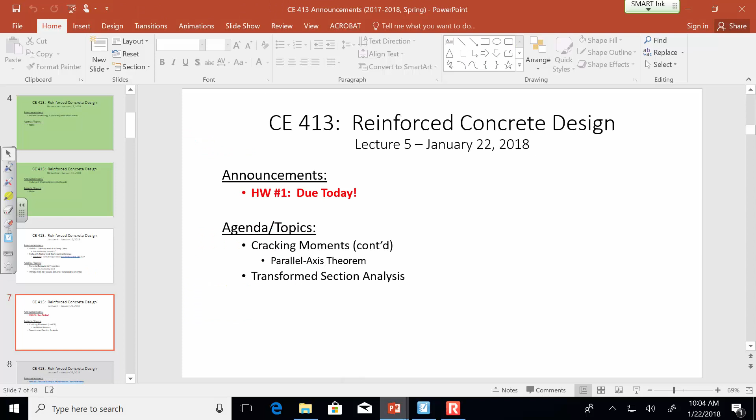I want to continue our discussion of cracking moments. That's going to take up the big chunk of lecture today. We're also going to talk about the parallel axis theorem, something you employed in mechanics of deformable bodies, and probably in statics and dynamics too. I'm not really sure, but regardless, I want to revisit it and represent it in a systematic, straightforward way. You need that concept in the back of your head in order to do transformed section analysis. The long and short of transformed section analysis is: cracking moments are basically trying to determine how much moment a concrete beam can resist linearly until it cracks. What happens after it cracks? You have to perform a transformed section analysis, which we'll get into the specifics of later. The long and short of it is you have to ramp up the math a little bit, but it's not too bad. Okay, so let's kick it off where we left off last time.

Last time we were looking at this problem, example 2, and we said let's determine the cracking moment. The cracking moment is determined by taking FR times IG divided by Y sub t. First, FR is our modulus of rupture, which is 7.5 times lambda times the square root of FC prime. Lambda is 1 because we're dealing with normal weight concrete, and our FC prime is 4 KSI.

Now remember, when you calculate F sub R, you've got a square root of FC prime going in there. When you have a square root of FC prime, how does that work? You put in PSI and you get out PSI. So you say 7.5 times 1 times the square root of 4,000 PSI, and your numerical response, which is like 474 something, comes out in PSI. So the modulus of rupture of this concrete is 474 PSI. That's how much tensile stress it takes to cause the onset of cracking in a flexural element.

So this is the stress that causes cracking. IG, your moment of inertia, it's a rectangular section, just BH cubed over 12. Y sub t is the distance from the centroid to the bottom of the section, because we're talking about positive bending and the bottom is experiencing tension—that's 9 inches. So plug and chug, don't forget to throw in your unit conversions, and you get about 25.6 foot kips. So the cracking moment for this section is 25.6 foot kips.

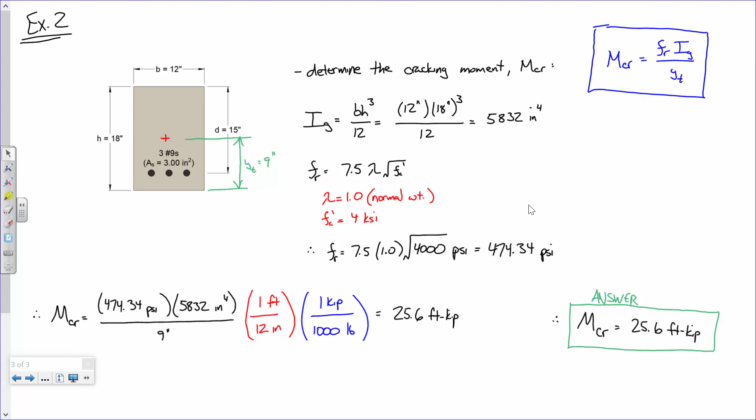In other words, if I want to determine the tensile stress... yes, that's the modulus of rupture. FR is the modulus of rupture. That's the stress at which cracking will begin. Sound good? All right.

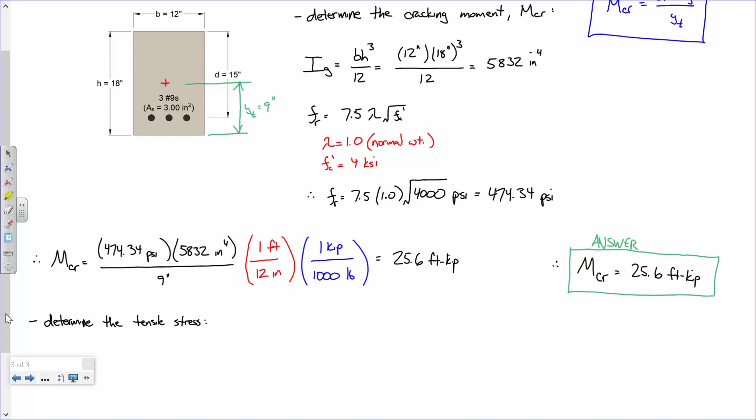So if you have a beam subjected to a bending moment, and you know Y and you know I, if I want to determine the tensile stress, it's just sigma equals My over I. Instead of sigma in reinforced concrete, we tend to use the letter F for stress. So I'm going to say the tensile stress is just My over Ig, and I'm going to call that... hold on... YT.

Okay, so plug and chug, and I want to make sure everybody's clear on what I'm doing. This beam is subjected to a bending moment of 25 foot kips. So I want to determine what is the bending stress under 25 foot kips. So I'm taking 25 foot kips times, what's Y sub T again? 9 inches. And the moment of inertia is what?

All right, anybody see a problem? Okay, feet and inches, it's not really matching. Again, and I mentioned this in structural analysis, it really wasn't too big of a deal because a lot of our units were really consistent there. Units really wasn't that big of a deal, like especially when solving for support reactions. All your forces are in kips and all your distances are in feet, so it worked out. In here, got to be a little more cognizant when it comes to your units.

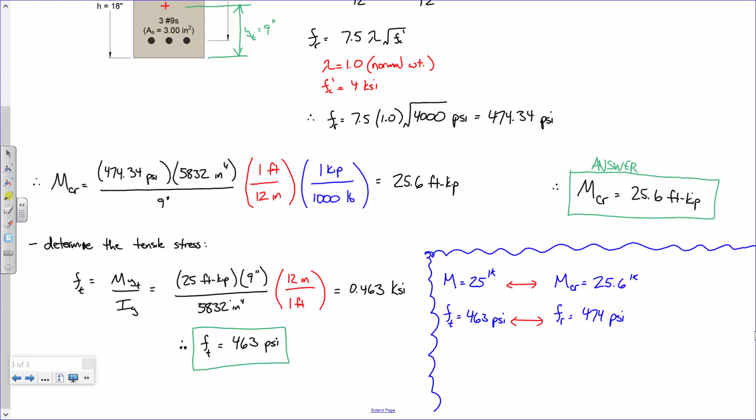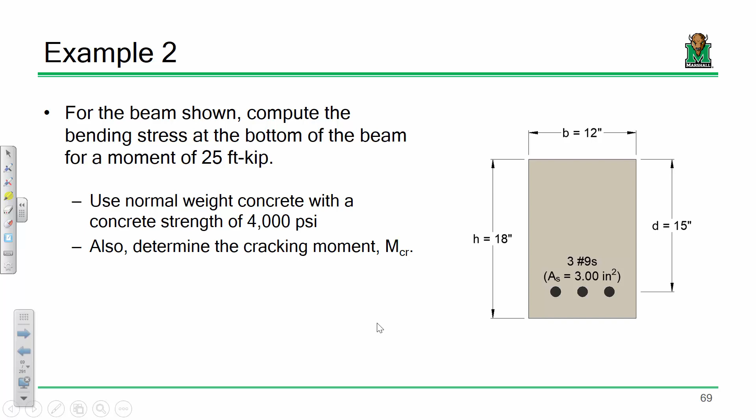Now I'm going to take this example that we just did, and we're going to do it again, but I'm going to make it a little more complicated. So this is the example that we just did. One thing you'll notice, what's one piece of data that we didn't use at all in this example? The rebar, we didn't care about it. Why not? Because we were looking at moments before the cracking moment, stresses before FR. The rebar doesn't really matter in that instance because we haven't experienced cracking.

On example 3, it's a very similar scenario, so I'm not really worried about the cracking. What I am worried about is this. I have a beam, and honestly, this really isn't even a reinforced concrete problem, it's just a straight mechanics problem. Here's the beam. It's subjected to a bending moment of 80 foot kips. What's the bending stress? This is a mechanics of deformable bodies review problem.

Let me ask you this: what's the moment of inertia of this? We knew the moment of inertia was just BH cubed over 12. What about that one? How do you determine the moment of inertia over that? It's a trick question because it's a process, not just a formula. You have to use the parallel axis theorem. We'll take it a step at a time, because for those of you it's been a while, it's not that bad.

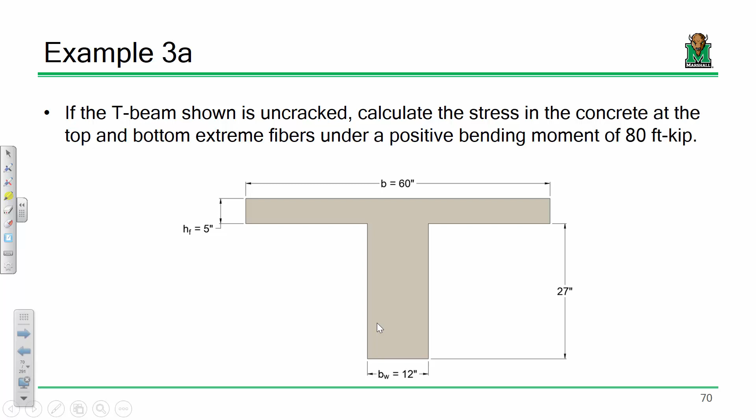It's like 10:15, it's not that early. Come on now. What's that? Yeah, yeah, all right, okay.

I'm lazy, so I'm copying this over. Okay.

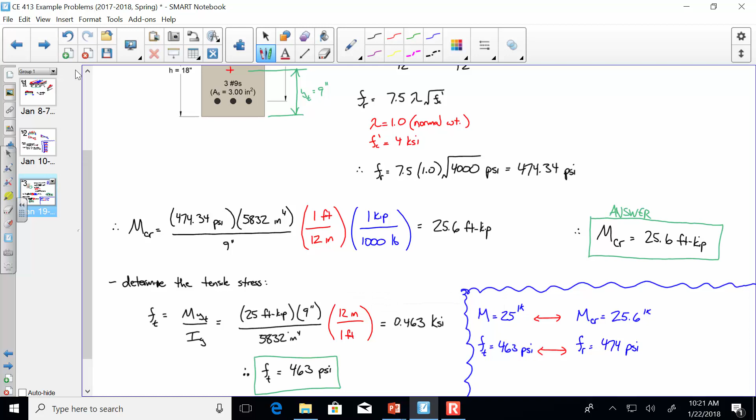Woo. That is big. Okay.

So like I said, this problem really isn't so much of a concrete problem as it's a mechanics problem. But don't worry, it ain't so bad.

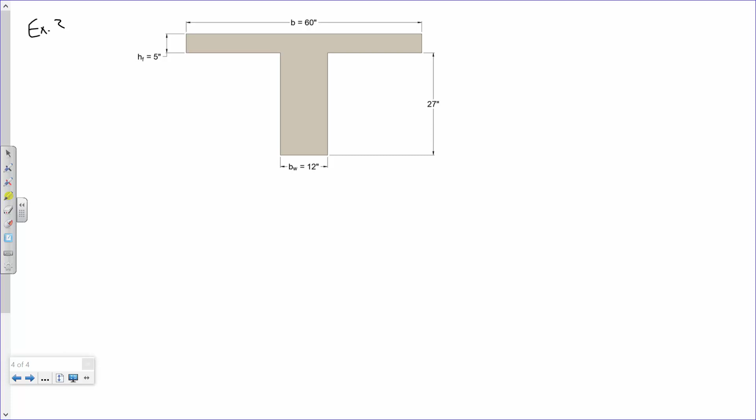What I'm going to do here is determine the moment of inertia of this shape. I'm going to use a procedure similar to something you've seen before, but present it in a little bit of a different light. In order to determine the moment of inertia, the first thing I need to do is determine the centroid. That's where we're going to start first.

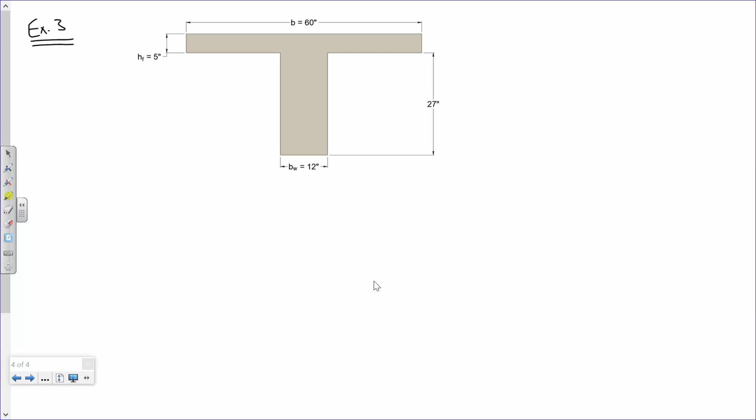In order to determine the centroid, if you recall, everybody here has done a centroid calculation before. We have to first determine a reference datum. So you pick a point, maybe on the bottom of the section, and we'll call that the reference datum. Because how do you determine a centroid? Sum of AY over sum of A. The Y distances all have to be referenced from a common location, so I think it's simplest to reference everything from the bottom.

The next thing you have to do is split this shape up into simple shapes. I see two rectangles here, so I'm going to split it up like so. We'll say this is shape 1, and this is shape 2. We split it into simple shapes because we know where the centroid of each individual shape is. The centroid of shape 1 is probably about right there, and the centroid of shape 2 is about right there.

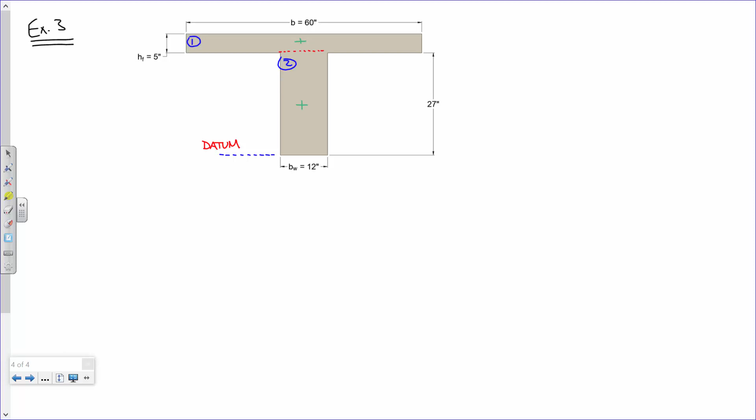Now I'm going to draw a table down here, and I'll warn you, it's going to be a long table, like seven columns, so just be aware of that.

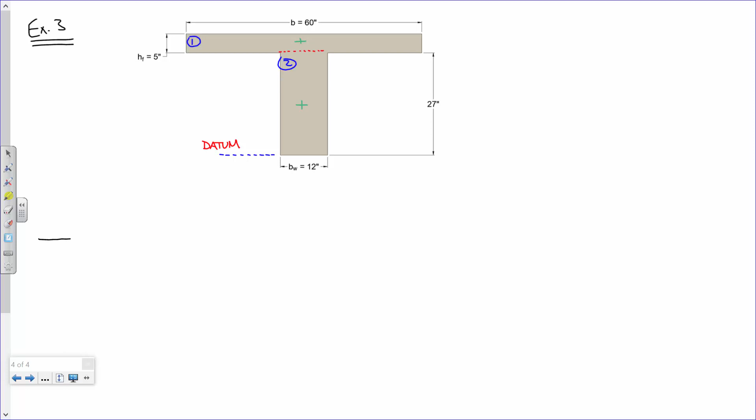So let's draw this out. We have shape 1 and shape 2. Like I said, there's going to be about seven columns, so just be aware of that. Now I'm going to determine the centroid first.

In order to determine the centroid, it's sum of AY over sum of A. So Y bar is the sum of AY over the sum of A. We're going to take our time with this. Let's start off with each of these shapes and ask ourselves what's the area, which will be in square inches. So what's the area of shape number 1?

I got 300, right? 60 times 5 equals 300. We don't need units because I've got that on the top of the column. All right, so that's the area of number 1.

What's the area of number 2? 324 — do I have a second on that? So if I sum those up on the bottom, I got 624. Fair statement?

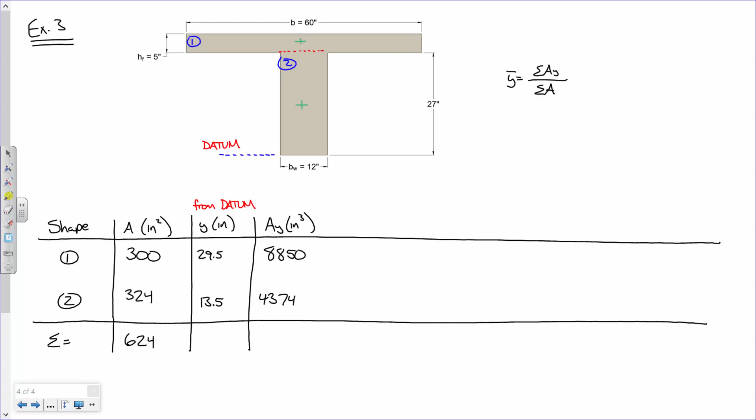What's the second one? All right, so add them up — what do we got? 13,224, do I have a second on that? So up top, I can say this is 13,224 inches cubed divided by 624 inches squared. What does that come out to be? We'll say to 2 decimal places.

Do I have a second on that? Okay, all right. So far, so good?

Now, here's where the parallel axis theorem comes into play. We can determine the moment of inertia of a simple shape, a very basic shape, just BH cubed over 12 for a rectangle or any other simple shape, you can look it up.

But to determine the moment of inertia of a composite shape, something like this T-beam, because this T-beam isn't a rectangle, it's 2 rectangles, how do you determine the moment of inertia of the whole thing? You utilize what's called the parallel axis theorem.

The parallel axis theorem states that the moment of inertia of a composite shape is calculated by summing up the following terms: I naught plus AD squared. You do that for all the shapes in the cross section.

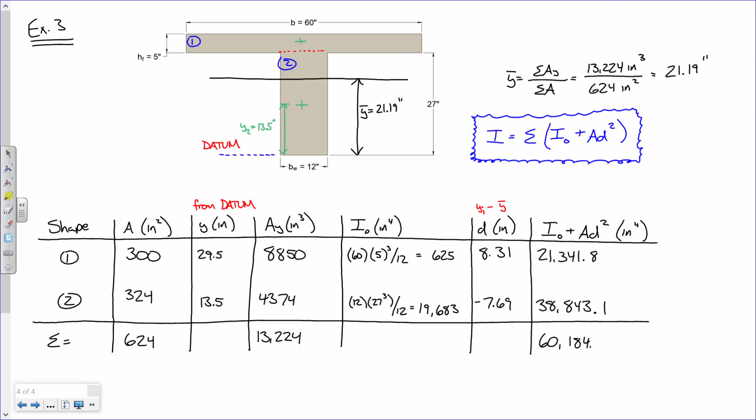60,184.9. So I propose that the gross moment of inertia for this beam is 60,184.9 inches to the fourth. That's not the answer, that's just the gross moment of inertia.

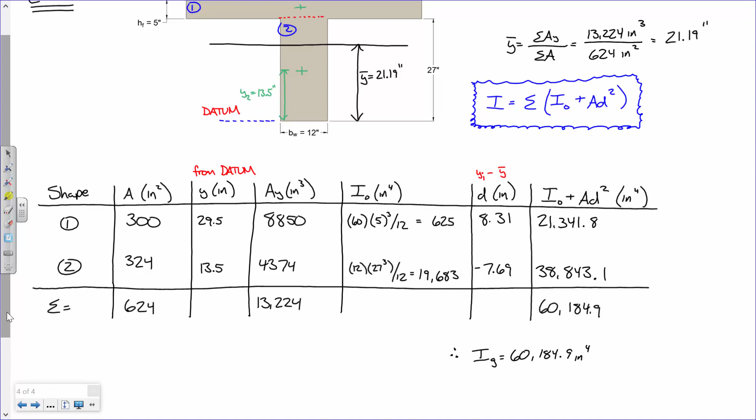Sound good? Is this bringing it back a little bit? You might have done this a little differently, but I've got to believe you've done calculations like this before in some fashion or another. This is also a very nice Excel-friendly template because you could just spreadsheet this whole thing.

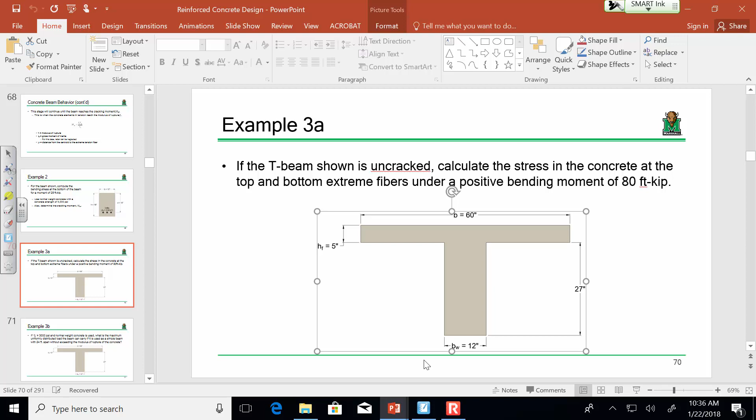Okay, now let's go back to the example. So if I have this T-beam and it's subjected to a bending moment of 80 foot-kips, what are the stresses in the top? I asked for the compression and tensile stress because I want to make sure everybody's clear about what's going on. I want the stress in the top and the bottom.

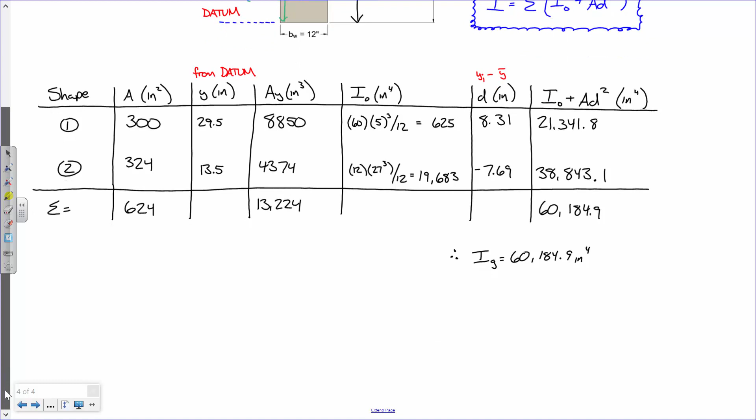Remember, if you have a beam and you bend it, the center sees zero stress, everything above the center sees compression, everything below sees tension, but I'm using the term center a little loosely. What I'm really talking about is the centroid. See, here is our beam, and the centroid is about right there.

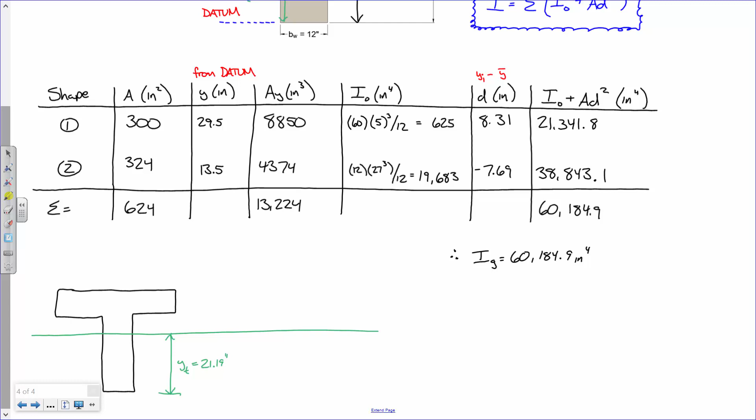So for this beam, I propose, what is this distance right here? Anybody remember the number? From a notation standpoint, I propose that's YT. That's what that is, right? From the centroid to the tippy bottom of the section, if you will.

So this distance, let's call this YC. Now what is that? 10.81. Now how'd you get that? Just take the whole height and subtract that distance, so 10.81 inches.

Okay, so there's our geometry, and if we look at our bending stress profile, it looks something like this. Remember, it's linear from the centroid, so it looks something about like this, sort of like that.

So this term right here, we'd call that F sub T. I'm actually going to call that F sub T tens, because if this is the maximum tensile stress, this right here is going to be the maximum compressive stress. I don't want to use FC because I don't want you to confuse that with FC prime. FC prime is a material value; this is looking at the actual stresses on the section. Sound good?

10.81. Oh, whoops. Thank you. You're right, thank you. We'll say 0.1 on the mistake counter this semester. Is it? What's that? 0.1, 0.1. It was supposed to be 0.1, so it's 0.1 on the mistake counter. That's how my brain decided to make it work. That was a joke.

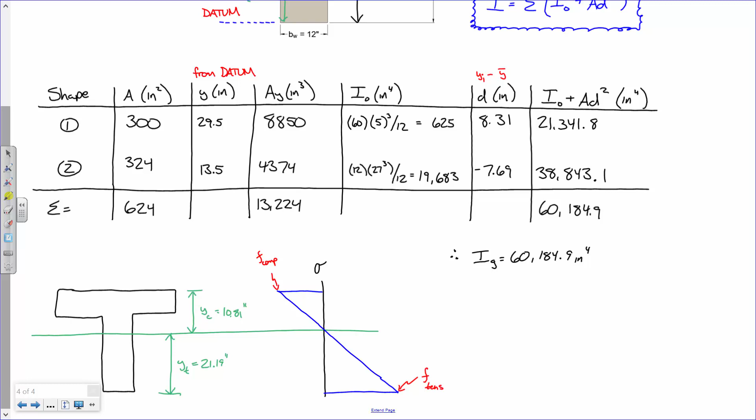Everybody good on this? Everybody good? Okay, all right, settle on. Okay, so if you understand this, then can I go on to the next panel? Okay, all right.

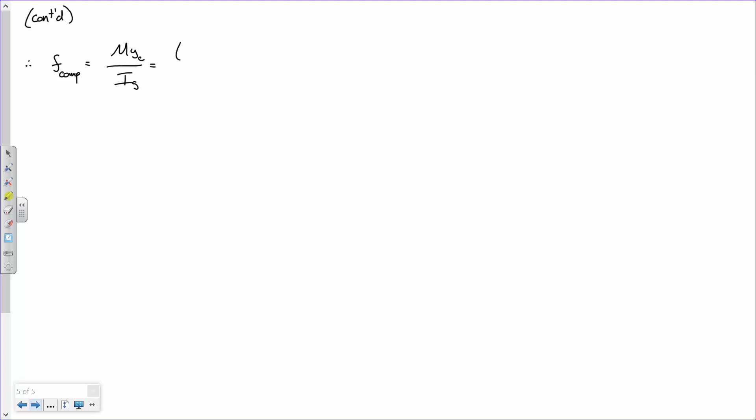I propose that in order to determine, let's say, the compressive stress, I'm going to take M over I, which is 80 foot-kips times 10.81 inches divided by 60,184.9 inches to the fourth.

Convert. And then while I'm at it, go ahead and convert again. Let's take those kips, convert those into pounds. What are we getting for this?

Say it again. 172.43. We'll say 172.4 PSI. All right, so first off, the compressive stress doesn't really matter if we're talking about cracking, but it just gives us a little bit of an idea on numbers.

Tensile stress. Tell me what's right. Times what? There we go. So, I mean, think about it: your tensile stress is going to be more than your compressive stress. It makes sense because the section's not symmetric, so you're going to have a higher tensile stress.

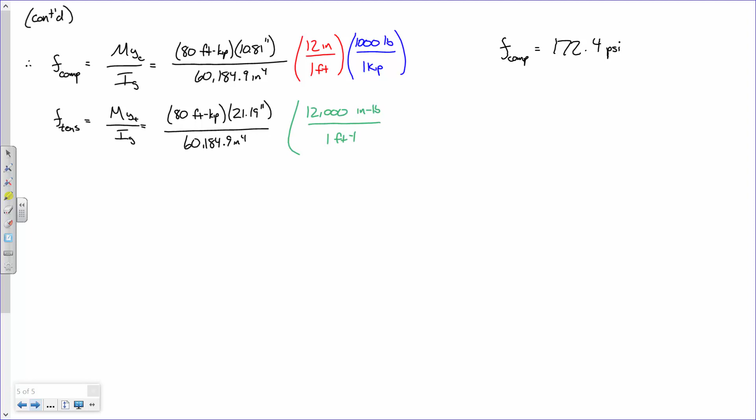184.9. And then what I'm just going to do is this: I'm going to say 12,000 inch-pounds is 1 foot-kip. I'm lazy, so.

338. Point what? Second on that? So here we go.

Any questions? What do you think? Not too bad, right? All right, let's keep going with this a little bit.

I want to explore the use of this cracking moment concept. I just want to dust off the structural analysis and mechanics skills. Okay, all right, so let me ask you this.

Now let's take this same beam, let's look at the next part of this example. So we got example 3A, got example 3B, let's take a look at the next part. Let's say this beam is comprised of normal weight concrete. So normal weight concrete, what's that tell us? Lambda's 1, okay? So normal weight concrete with an FC prime of 3,000 PSI. What is the maximum uniformly distributed load that the beam can carry if it's a 24-foot simply supported beam without exceeding the modulus of rupture? In other words, how much load can we put on this beam before it starts to crack? Let's see what happens, let's see if we can figure that out, okay?

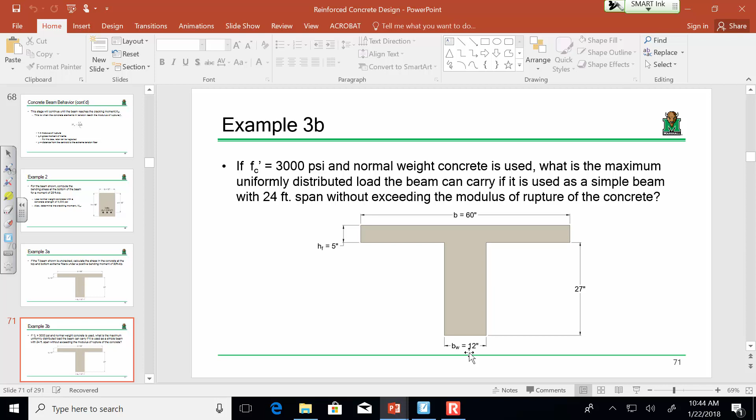That's how it starts. To really get it, you got to. This is the source of PTSD. All right, now hold on.

What's the question asking us? It's asking us how much load can this beam carry before it starts to crack? Let's look at our previous example. What do you think we ought to calculate right now? Maybe a cracking moment? Let's see what the cracking moment is.

How do we determine the cracking moment? Oh, come on, we just looked at that. You can go, it's Monday, my man. All right, cracking moment is FR times IG over YT.

So let's look at this. Do we know what IG is? What is that? Do you know what YT is? What is that? There we go. See, this isn't so bad.

Now, how do we compute FR? What do we need? A lambda and a square root of FC prime. What is lambda for this beam going to be? 1. What is FC prime? 3,000. That was on the problem statement. So, therefore, FR is 7.5 lambda square root of FC prime. Remember, you put in PSI and you get out PSI.

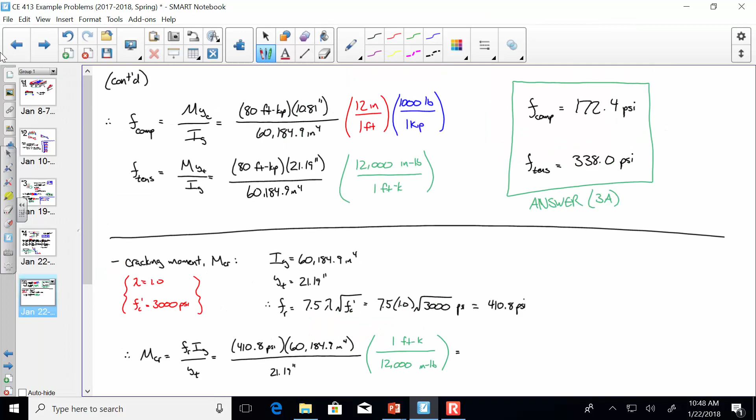97.23, bless you. Everybody okay with that? 97.23 foot kips. Does that answer make sense looking at the numbers? I think 80 foot kips cause that much bending stress. To get that much bending stress, we'd have to apply about 97. Does that make sense?

Sound good? Now, here's where things are going to get interesting, okay? And I know we're ending soon, so bear with me. All right, we have a beam.

Let's look at the case. The question asks, how much load is going to cause this beam to crack if it is a simply supported beam, uniformly distributed load? How do you determine the maximum bending moment on a simply supported beam subjected to a uniformly distributed load?

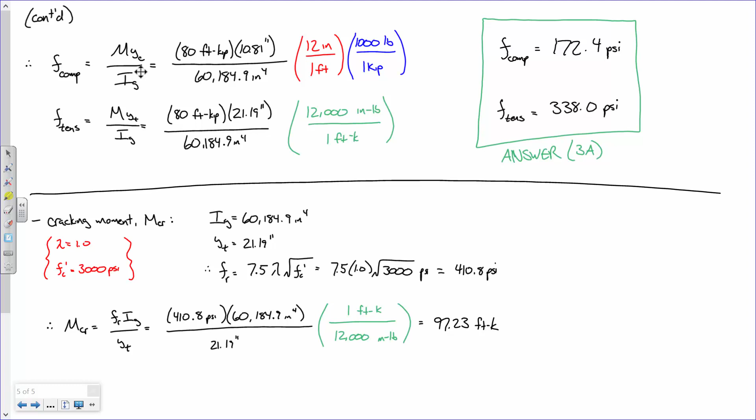No, what I'm getting at is, if I have a beam, there we go, WL squared over 8. If I have a beam that's subjected to a uniformly distributed load, M max is WL squared over 8. So what I'm getting at is this. If M max is WL squared over 8, what I propose is this.

Therefore, the load that's going to cause it to crack is 8 times the cracking moment over L squared. You see how I did that? So 8 times 97.23 foot kips over, now how long is this beam? 24 feet. Don't forget to square it. What is that going to give you?

We're going to get this answer. I'm going to ask you one question, and we're going to call it. So, 1.35. Do I have a second on that? So the cracking moment is 1.35, or cracking load, kips per foot.